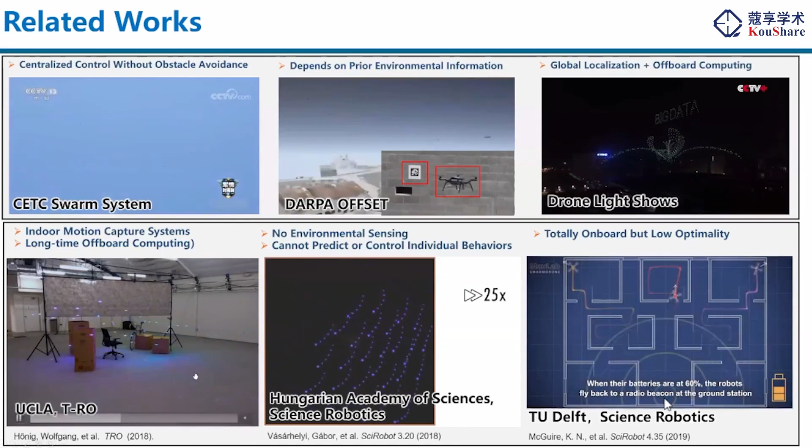In the research field in academia, we can see from previous works in swarm research published before our paper in Science Robotics that they propose autonomous swarms, but with only very limited autonomy, meaning they can only finish simple tasks such as following walls and exploring indoor environments.

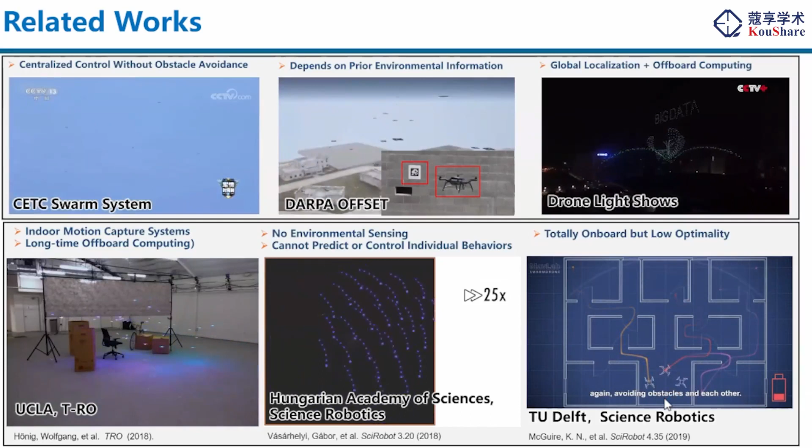Other works, such as one published recently in TRO, show people doing swarm coordination and planning, but this work also relies heavily on a motion capture system to localize the drones and on a ground station to compute all the trajectories, and all this computation is done offboard.

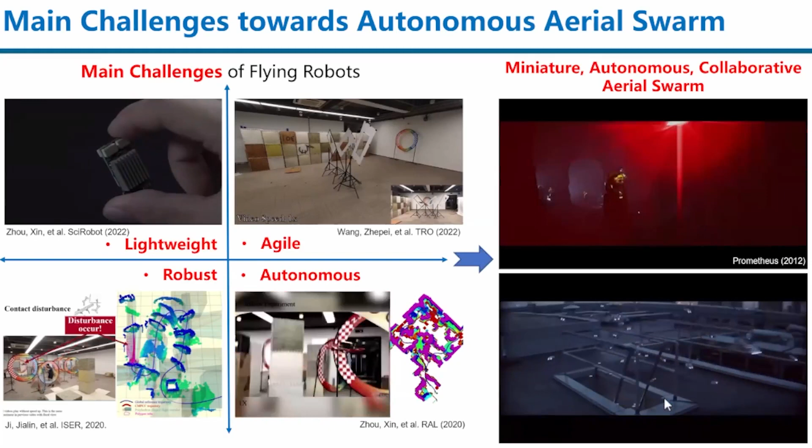Based on these observations and our basic motivation, I summarize some research challenges we have to solve first before moving toward our ultimate goal of making a miniature-size, autonomous, and collaborative aerial swarm system. The first challenge I name as lightweight: we have to build a very tiny drone platform with limited size, weight, and power that can do agile autonomous flight even in very complex environments.

The navigation functionality should be very robust to deal with many disturbances such as wind and human disturbance. Also, this whole system should work all by itself; it should be a fully autonomous system.

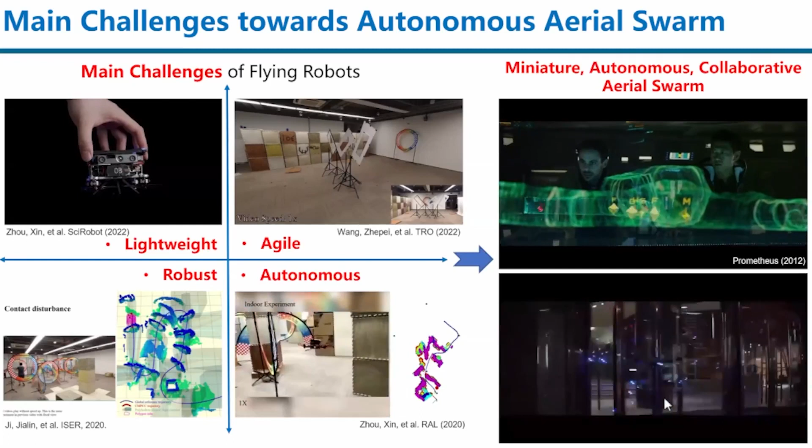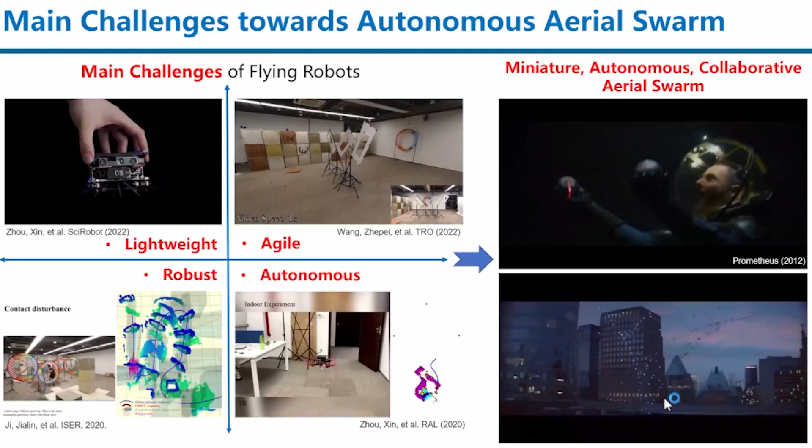After we finish addressing all these challenges, I hope we can finally make some swarm systems such as shown in these videos, which I've quoted from some scientific movies. By the way, I think that's also the point that fascinates me about robotics: it has long-term fascinating scientific imagination as a goal, and it should also have many step-by-step solid technology accumulations that can help us chase this dream.

To this end, we first have to deal with a basic system consisting of many basic problems, such as how to make a single drone that can fly with full autonomy. We name this diagram the perception-action closed loop, which means the drone should use sensing capabilities such as cameras and other sensors to collect information from the real world and compute its own pose at real time, which is called localization.

It should also understand the environment—at least where the obstacles are and where the free space is that it can fly through. That's called mapping. Based on localization and mapping, the drone has to do planning, which generates a safe flight path to avoid any possible collisions and navigate to the final target.

Then the controller will execute the flight path perfectly and let the drone localize and stabilize itself during flight. After all this is done, we have built an autonomous drone such as shown in the right-hand figure. This drone is built in our lab at Zhejiang University, with a depth camera and also uses the inertial measurement unit inside the flight controller to do localization and mapping.

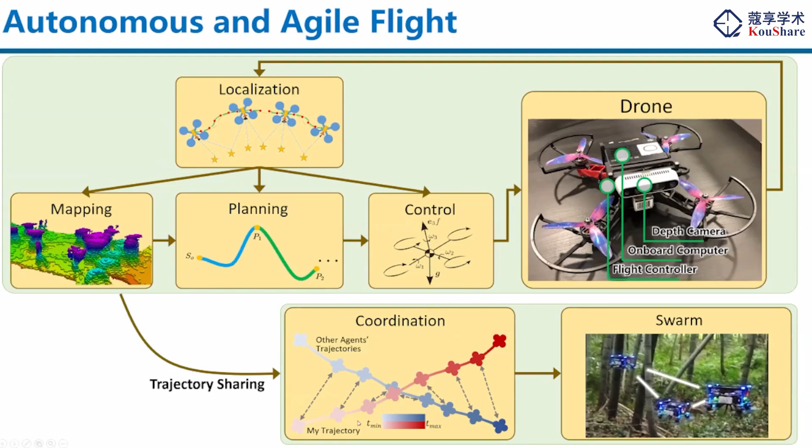All the functionality, including localization, mapping, planning, and control, is done on the onboard computer in real time. After building this single drone, we wanted to take a step forward toward coordination, so that we could then build a swarm system.

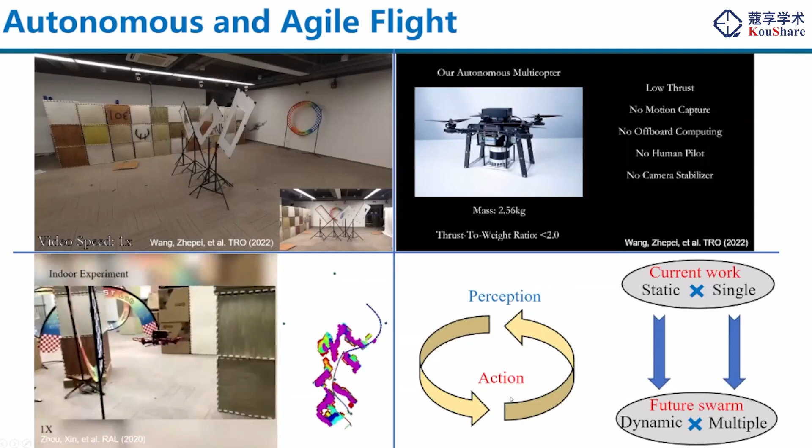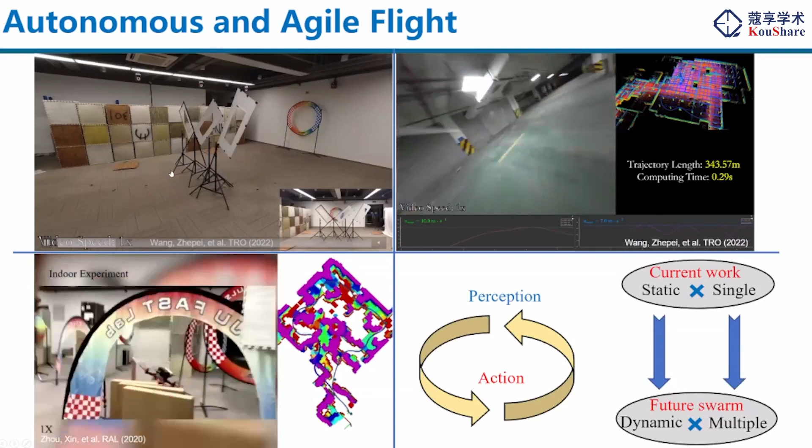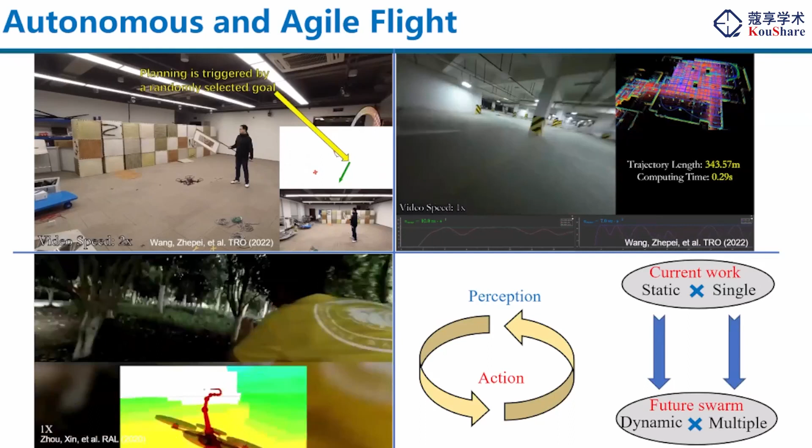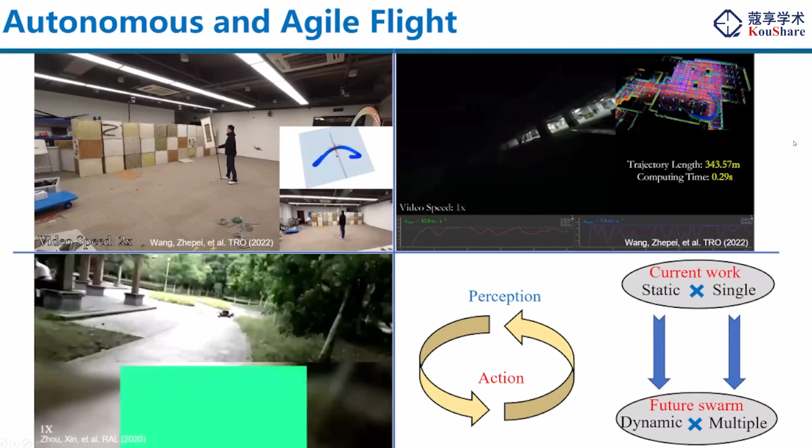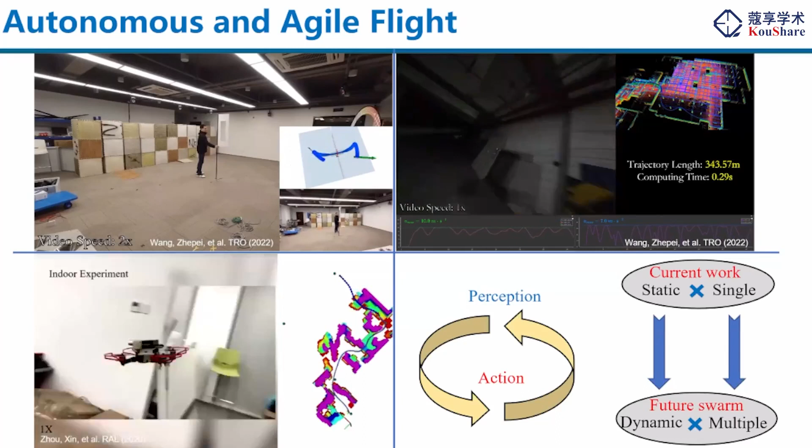In the second video, we show a drone flying with full autonomy at a very high speed, up to 10 meters per second, in a totally GPS-denied environment, an underground garage where the obstacles are previously unknown to the drone. It has to detect all the obstacles and plan a safe flight path in real time.

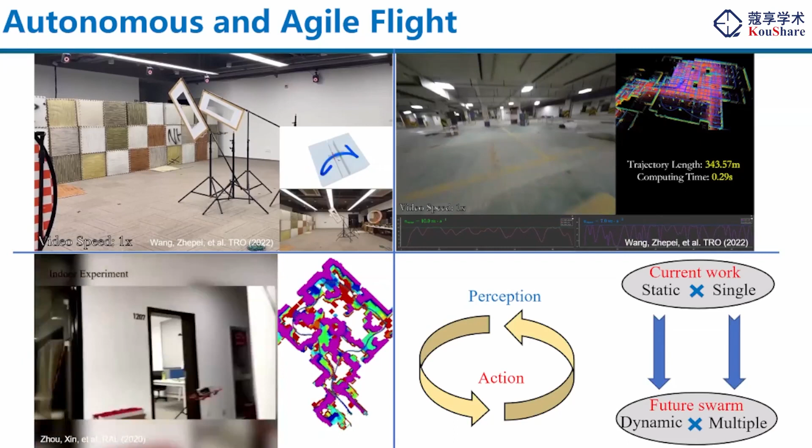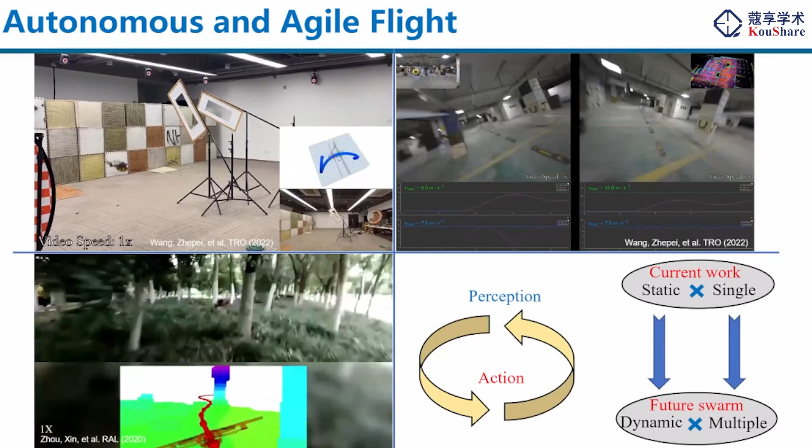This video shows a drone equipped with only vision sensors flying without any external localization devices, in various indoor and outdoor experiments.

I want to summarize some more technology difficulties we have to face towards the next step, swarm. Current work has successfully shown the application of a single drone navigating in static environments, but if we want to extend it to swarm, we have to deal with two challenges.

The first is we have to plan safe trajectories in a fully dynamic environment, because with multiple robots, they will interact with each other during flight, even in a static environment, and also the environment itself may be dynamic. So we have to extend our planning algorithm and sensing algorithm to handle a fully dynamic, previously unknown environment, and also make our algorithm support more than one drone at the same time.

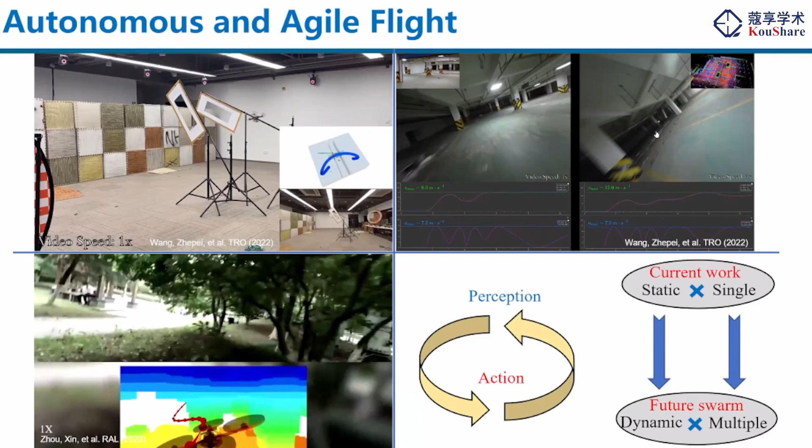To this end, I want to first introduce some of our recent work on autonomous navigation in dynamic environments. As we can see from this video, this work was published at IROS 2021 and is one of the best application paper finalists.

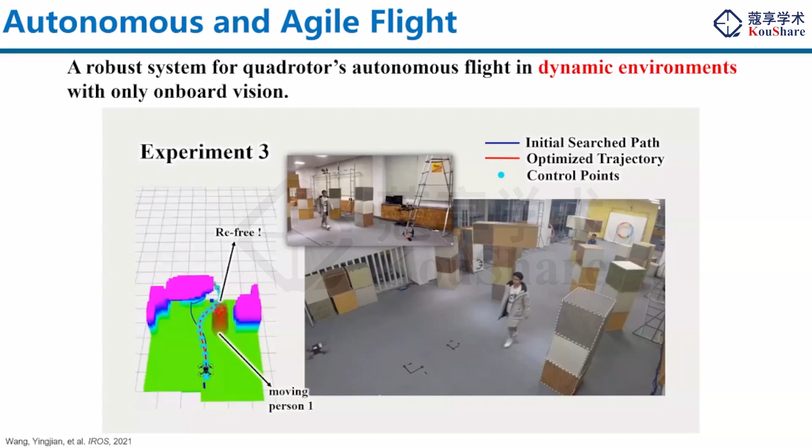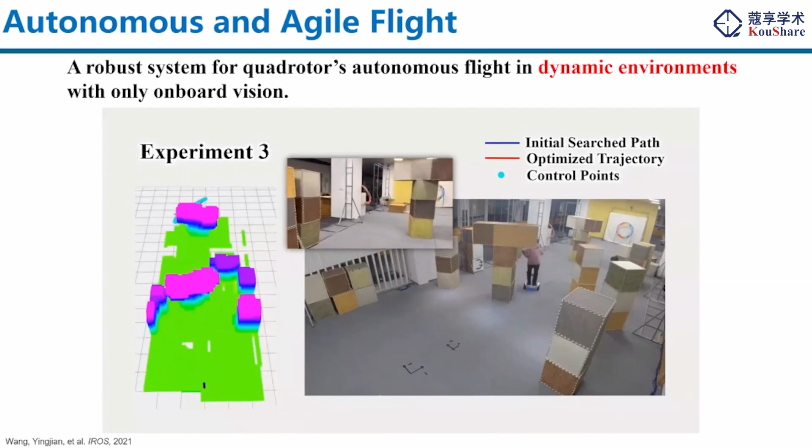In this work, our drone is only equipped with a stereo vision sensor, and we classify the obstacles as static or dynamic. After obstacle classification, we also have a module that tracks all the moving obstacles and predicts their future motion.

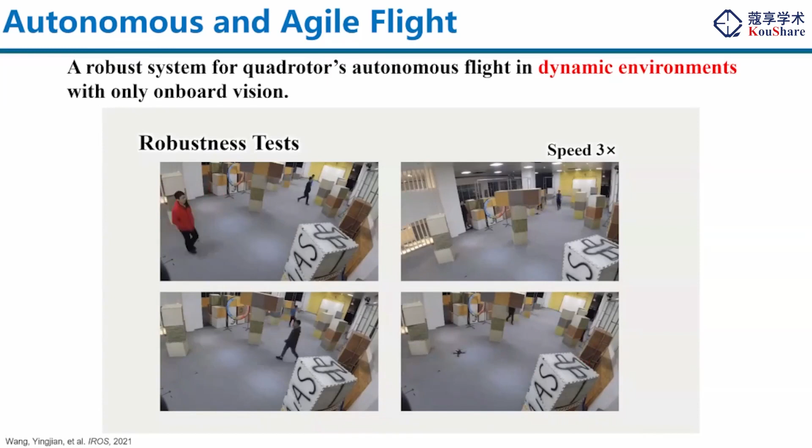Based on the sensing of the static and dynamic environments, we build two maps, and then propose a two-layered motion planner that can guarantee safety against both static and dynamic obstacles. A simple system diagram is shown in this figure.

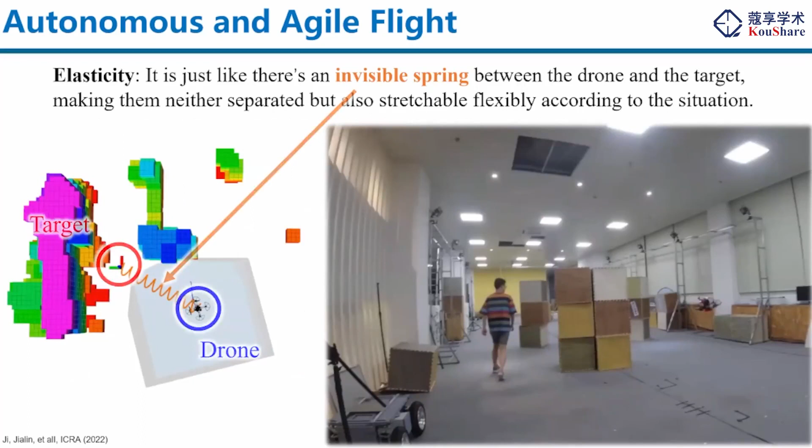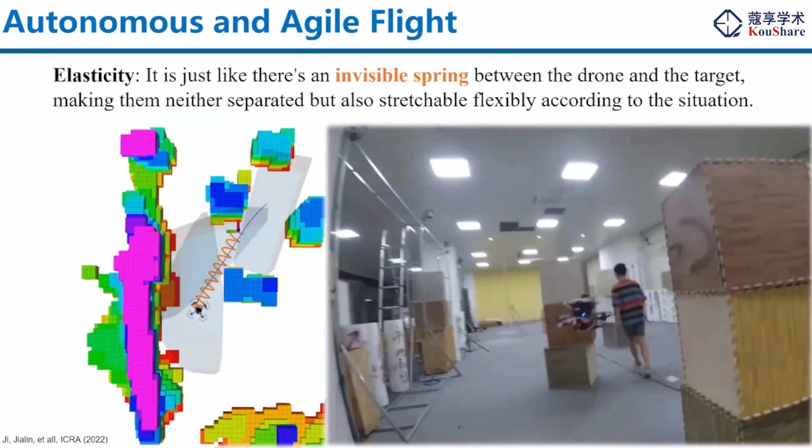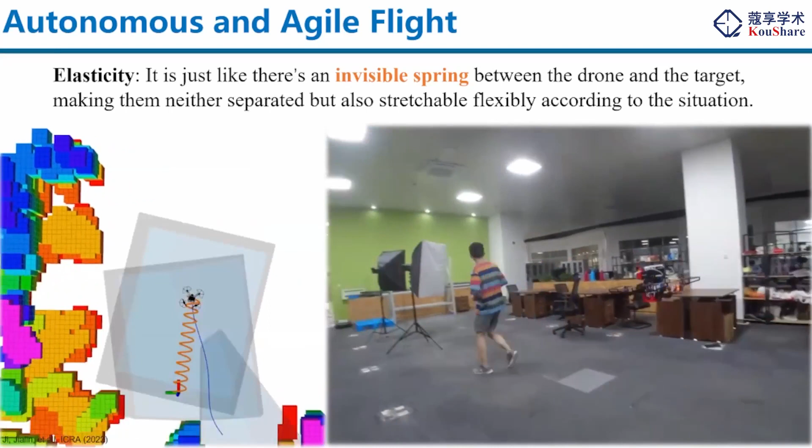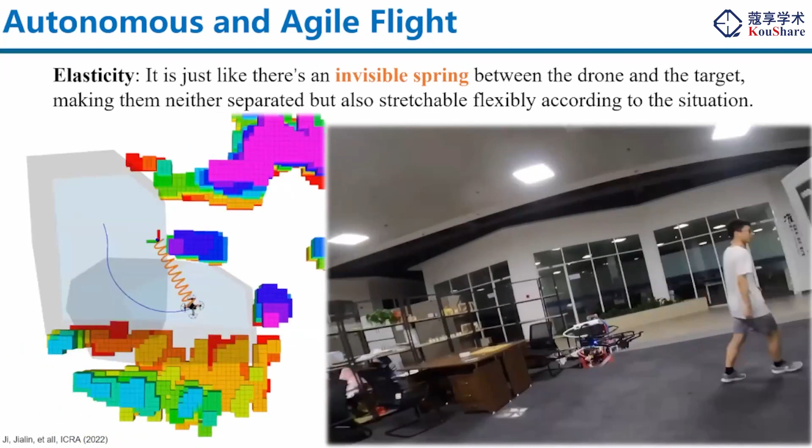Also based on safe obstacle avoidance in a dynamic environment, we want to add more functionality to our drone. We want this drone to follow moving people in an uncooperative way, meaning it has no information, communication, or coordinated control with the tracked target. So our drone has to keep a proper distance to the target — it cannot be too far, because it may lose the target and fail the tracking, but also cannot be too close, because it may be dangerous to the human.

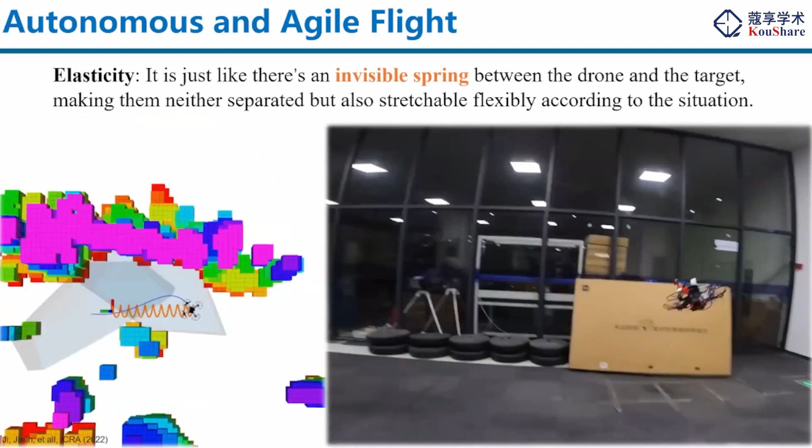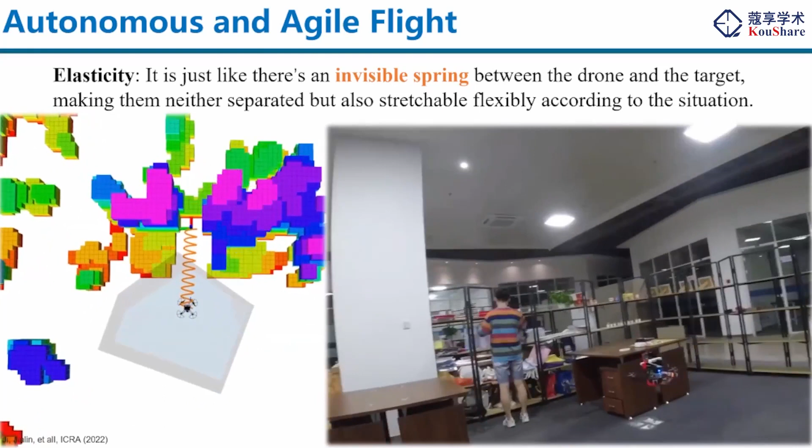So we propose a new algorithm, namely elastic tracking. We model the tracking distance constraint like an invisible spring between the target and the drone, because it has a stretchable flexibility according to the situation to keep them at a proper distance.

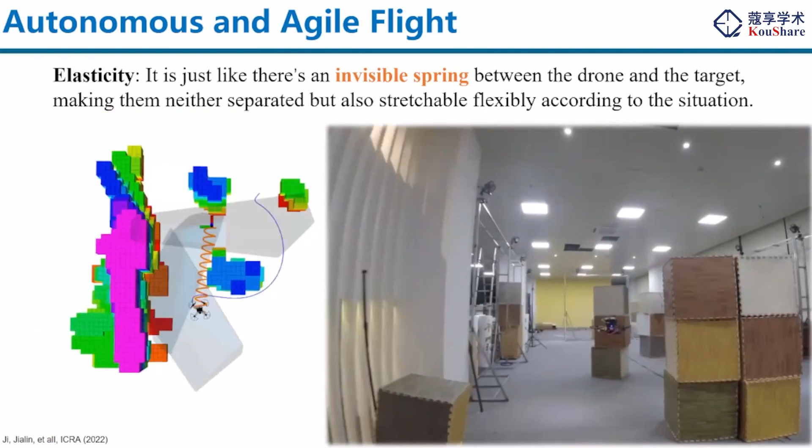But this is just an imagination and a motivation for how to mathematically solve this problem. It's a concrete planning program. So we write down this tracking trajectory optimization, and we can find that we have many constraints, such as boundary condition constraints — the drone always has to start from its current initial pose.

The drone should always have a collision avoidance constraint to avoid any possible collision, and also a visibility guarantee, meaning since we have a limited field of view of the vision sensor, we have to keep the target always in the FOV of the robot.

And finally, we have the distance keeping constraint I just introduced, which is modeled as an invisible spring. So we put them all together and propose a new customized optimization solver to quickly generate a safe flight trajectory, represented as a piecewise polynomial.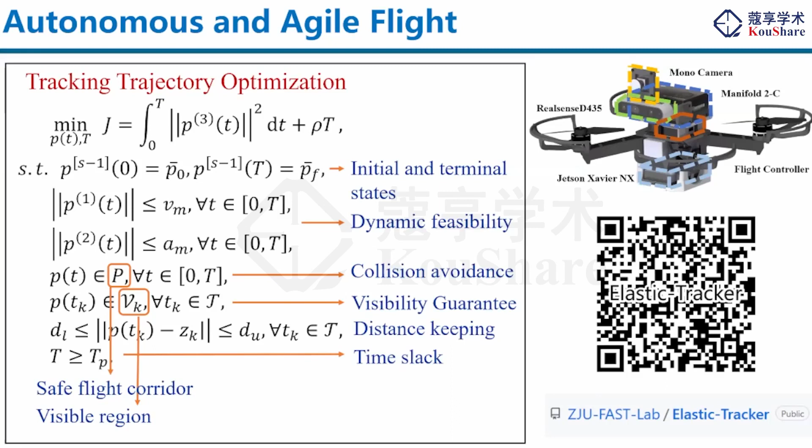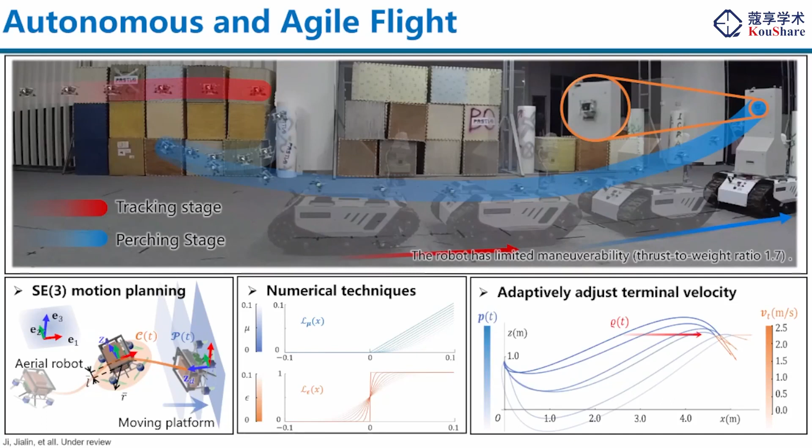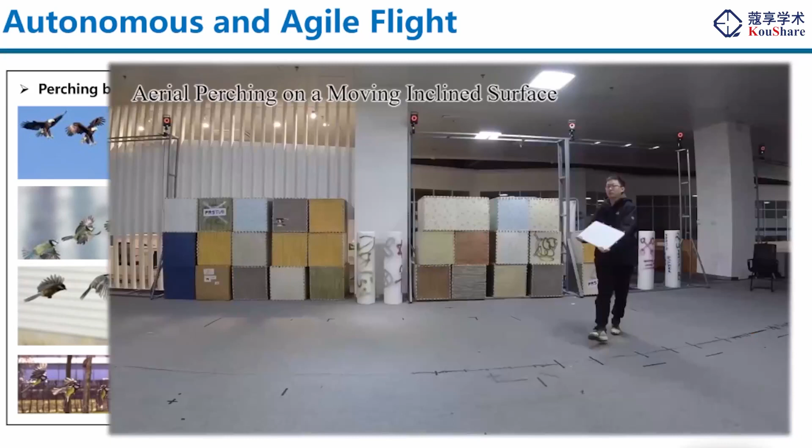Recently we also extended the tracking application further. We want to do autonomous landing, which is also named perching for birds. We use this word perching to let our aerial robot quickly land on a moving inclined surface. Based on the tracking program you saw in the previous slide, we have a complicated mathematical program, and now we want it not only to follow the target but also to land on this moving target. So we have more constraints and the program becomes even more difficult.

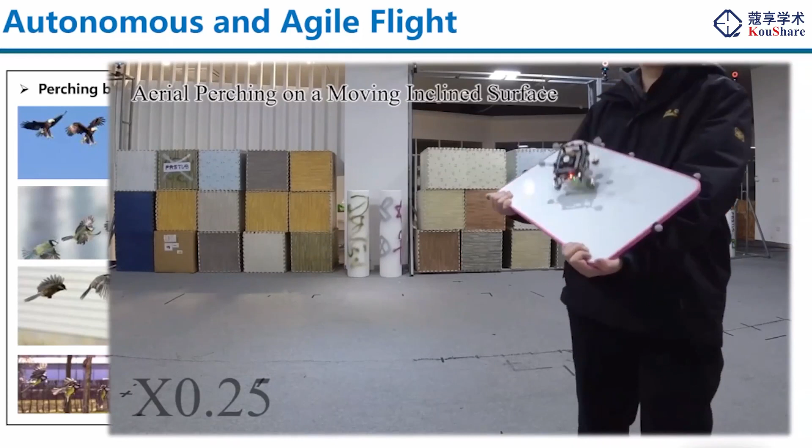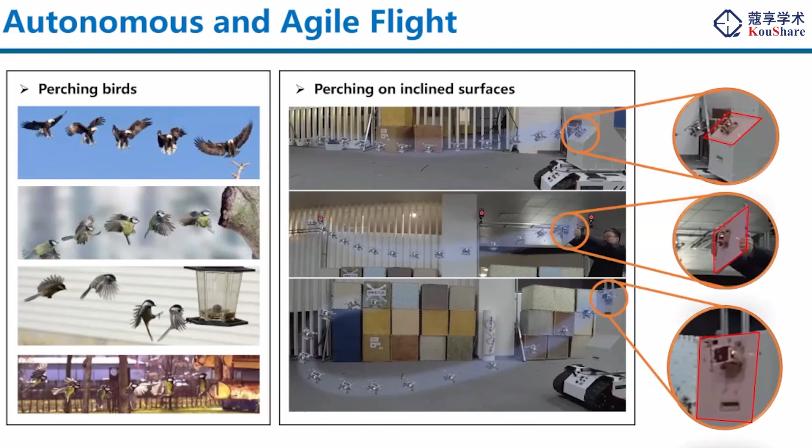Fortunately, since we have our customized solver, a method named MINCO published this year in a robotics transactions journal, our trajectory generator can support any kind of user-defined analytical constraints, and no matter in static or dynamic environments, it can safely generate a dynamically feasible curve for the drone to fly within several milliseconds.

So we successfully did the aerial approaching and landing. Based on all this recent research progress, and of course the previous single drone navigation technology in static environments, we think it's time to push the boundary toward autonomous swarms. Last year we built a scientific swarm system composed of many drones - I think here 'many' means more than 10 - a miniature swarm aerial robot platform, with each one able to do autonomous navigation with only its limited onboard sensing capability.

First, I want to introduce some of the hardware design. As you can see from these figures, our drone has a very limited size, with a tip-to-tip size of only 8 centimeters. The total weight of the drone without the battery is within 200 grams, and with the battery its total weight is about 300 grams.

For such a lightweight platform, we cannot afford heavy and accurate sensors such as LiDAR. So our drone is only equipped with a very simple and cheap stereo camera from Intel. For computation, although our drone has a very limited size, we want it to perform many complicated tasks such as formation flight, collision avoidance, and other high-level tasks like target following, so it needs sufficient computation resources to do all the calculation in real time.

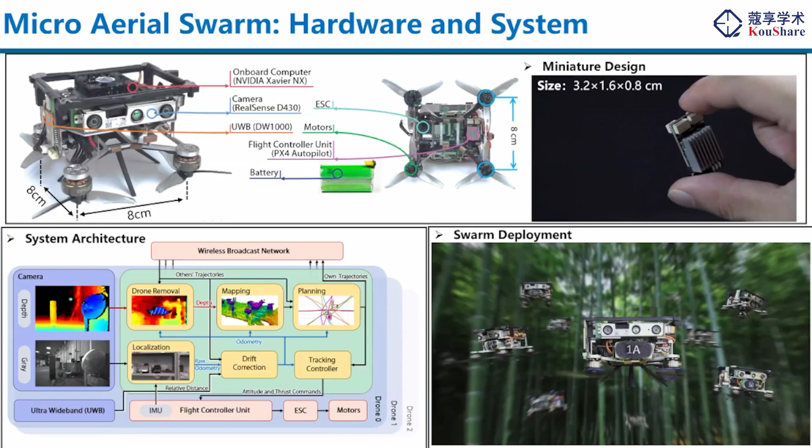Also, since we couldn't find a proper flight control unit, we customized one ourselves. Nowadays we have made a very small flight controller chip, based on the open-source and well-known flight controller framework PX4, customizing the software and hardware design based on PX4. Now we have this very small chip which can support the autonomous flight of our drone.

Based on this hardware design, we also designed a new, fully decentralized swarm software architecture. The core idea of our swarm architecture is that we want the swarm system to be very flexible. Here, flexible means each drone in the swarm system will do all the calculation related to its own flight by itself - we have no centralized brain to coordinate and communicate with each other.

Each drone does its own calculation, so even if during the flight one drone or two drones crash, the remainder of the swarm will continue its flight. Also during the flight, you can command additional drones to join the group, and they will reform a new swarm and carry out the same flight task as defined before the mission.

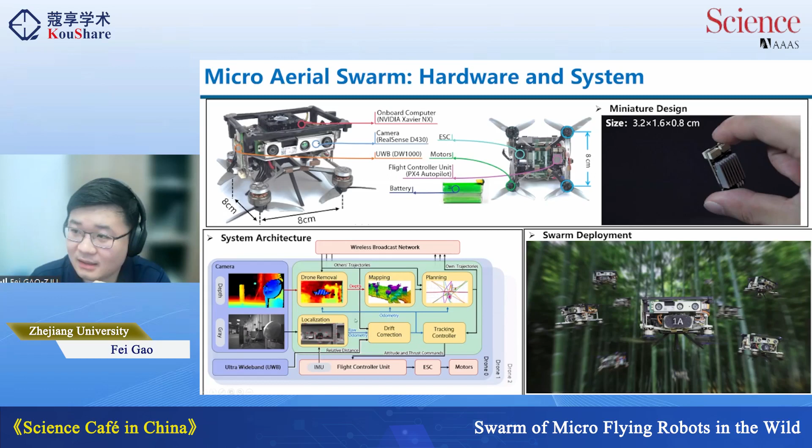Here's a snapshot of our system in experiment, and then we'll go through it component by component to introduce some key methodology used in this paper.

Based on the visual-inertial localization system, we also have another positioning algorithm which fuses the VIO and UWB measurements to calculate the relative position, translation, and rotation between each two drones in the swarm. Only in this way can we guarantee that the swarm in flight can form a predefined shape.

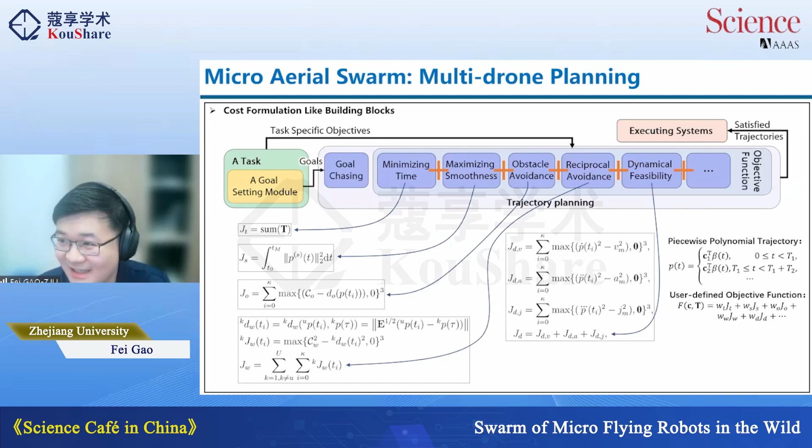One word to summarize: we translate the planning requirements into an unconstrained mathematical optimization program, and we have a customized solver which lets us solve it very efficiently. Efficiently means we can generate very difficult trajectories with respect to all the physical limits in just 1 or 3 milliseconds.

Apart from the optimization itself, we also put in some technologies, also called tricks, to make our planning system more robust against challenging and unstructured environments. For example, there's topological planning. Here, topology in planning means if there's an obstacle in front of you, you can go around it, both on the left side and the right side, and in both cases it's okay for you to reach the target behind the obstacle.

During the flight, our drone is always doing high-frequency planning, generating trajectories at 10 or 20 hertz. So in 1 second it does 20 times planning. If the drone chooses to go around an obstacle on the right side, but the next planning cycle decides to go left instead, the drone will shift back and forth. For a single drone, this causes oscillation during flight, and for a swarm, it tends to fail the obstacle avoidance mission.

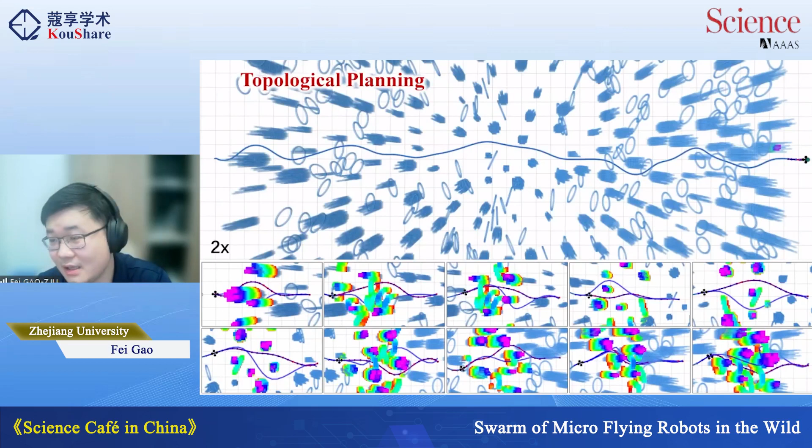So here we add a topological planning module to make our system always choose the better topology. Better topology means the drone can go either the right side or the left side, but we always choose which side is better according to some predefined rules. This way, our drone can consistently choose one side to go around obstacles, giving more stable and predictable flight performance.

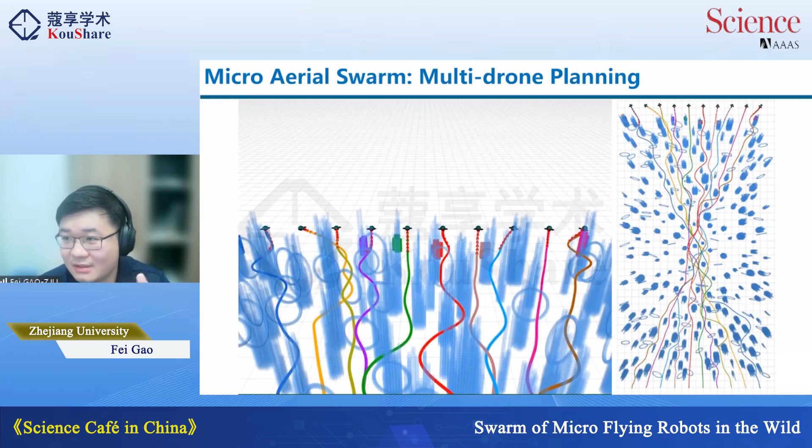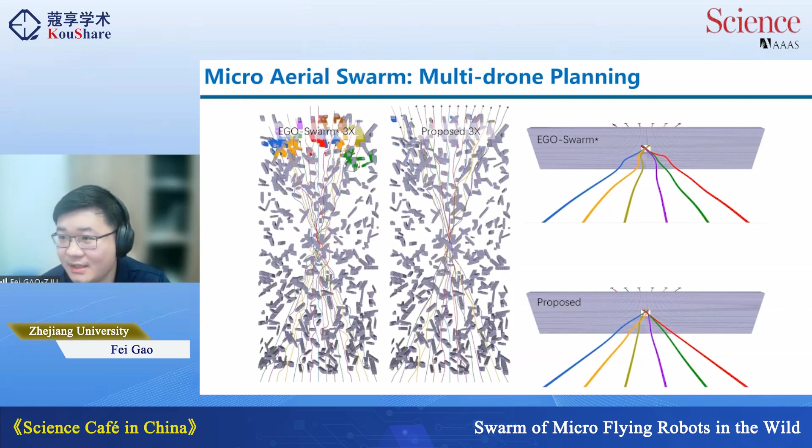Here is another video showing the performance of our algorithm. I think the sufficient and necessary condition for multiple drones to avoid collisions is that they will not appear in the same place at the same time. So trajectory generation, the planning for a swarm, means we have to optimize the shape of the trajectory and also the timing of the movement simultaneously.

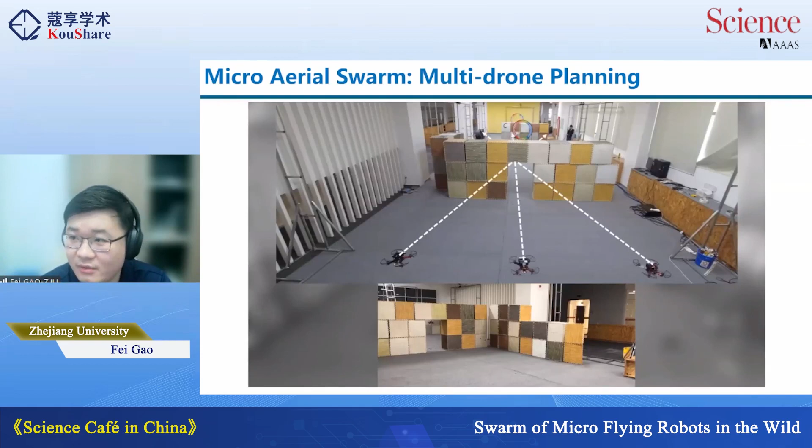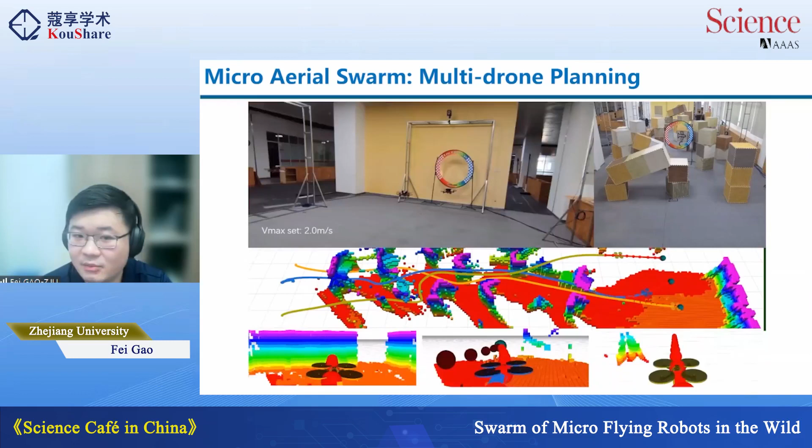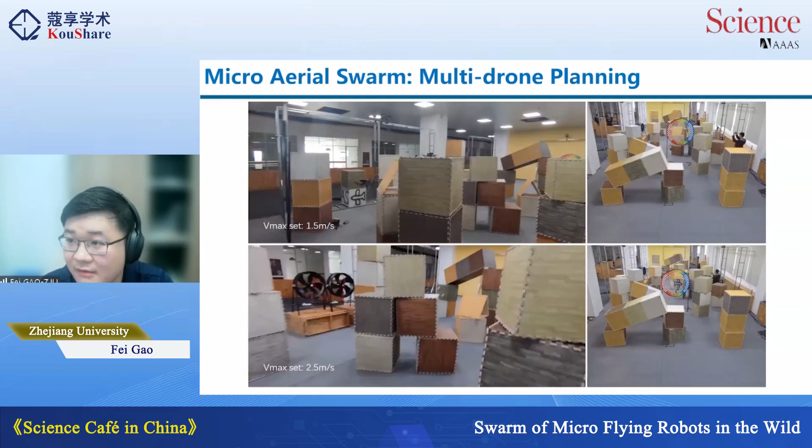Here we show the performance of optimizing time versus not optimizing time using the same planning framework. If we optimize the time, the drones can appear at the same place—that's easy to understand—but not at the same time. So even with a very narrow gate for the drones to pass through, such as shown in this video with some very narrow corridors, our drone can automatically generate safe trajectories to go through the narrow door one by one.

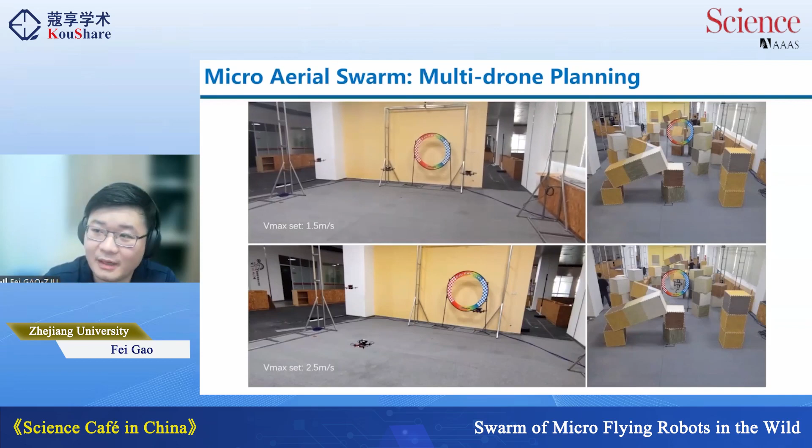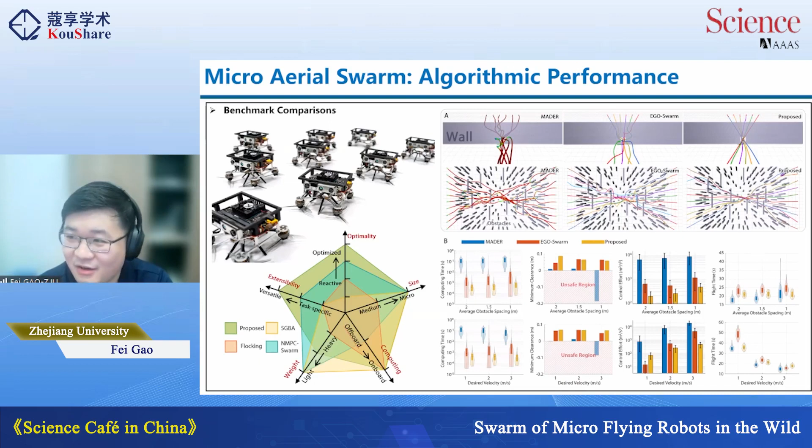Here are some more tests showing that even with many different kinds of objectives and constraints forming a complicated mathematical program, we can always safely generate the right solution. We check the minimal spacing between each drone during the flight, and also check the maximum velocity and other constraints. We found that our algorithm can always respect these constraints, no matter where they come from.

Besides the planning, some other key capabilities are very important. For example, I've just told you about the relative localization functionality, which comes from sensor fusion of visual-inertial and inertial measurement, plus UWB distance measurement. Without this sensor fusion, we can imagine that each drone would have its own position drift during the flight.

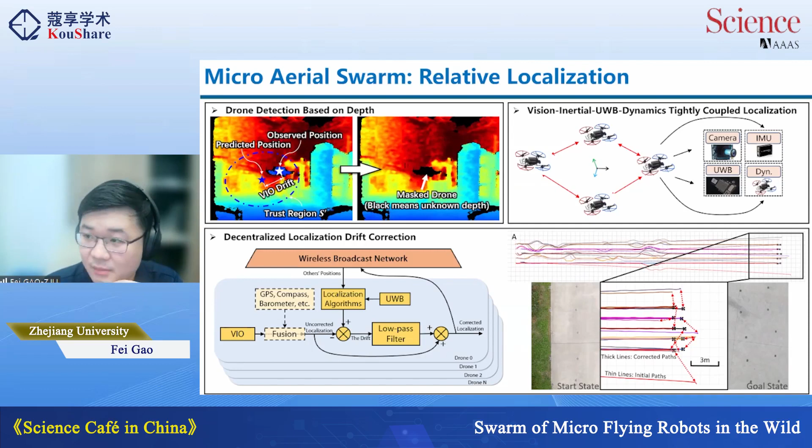Here is an experiment to show this phenomenon. After about 20 or 30 meters of flight, our formation will diverge quickly. But with the fusing of the UWB, we can maintain a good formation even in a very cluttered environment.

Finally, we can show some real-world experiments to verify the capability of our algorithm and our hardware. Firstly, here is an experiment—I know many of you have already seen these videos, possibly many times, but I want to show it again.

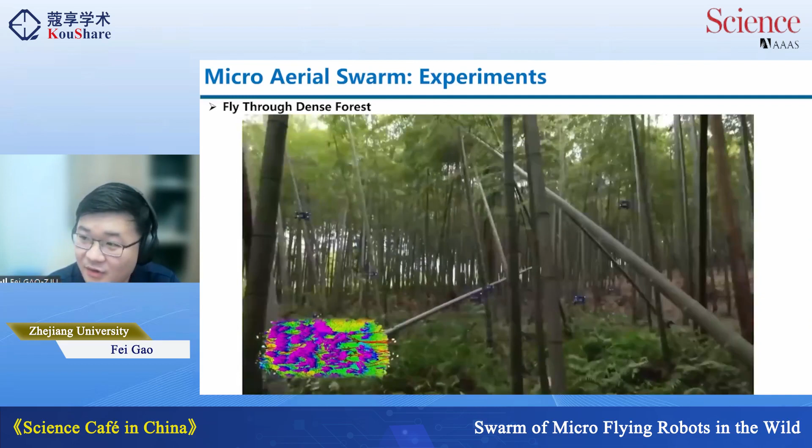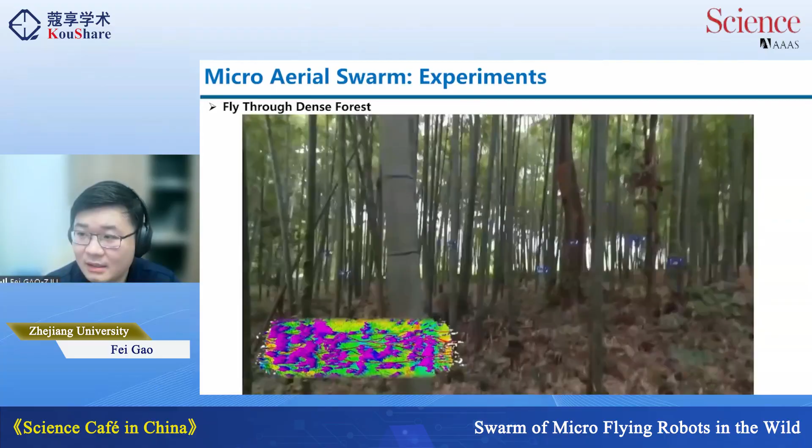We test our system in a bamboo forest in Anji, a very beautiful city in Zhejiang province. This is a very difficult experiment because inside the bamboo forest, the passing space for the drone is very, very limited. I've piloted drones for more than 10 years, and I cannot safely pilot a drone through this difficult environment.

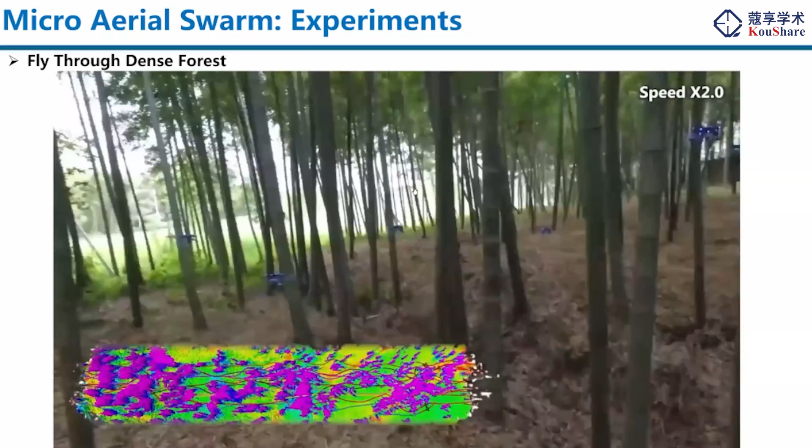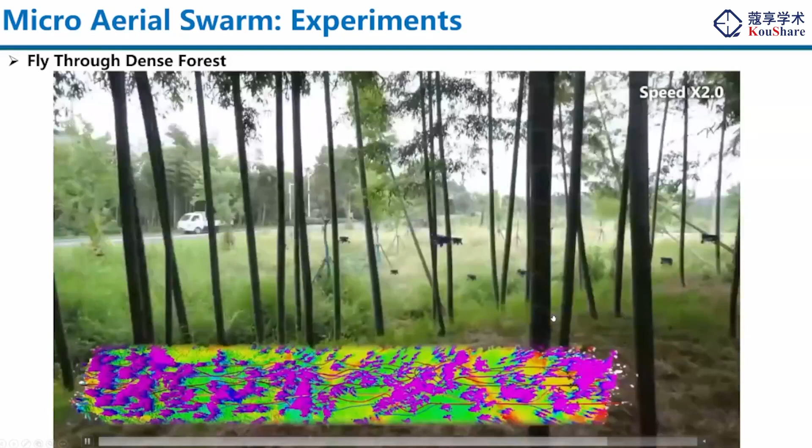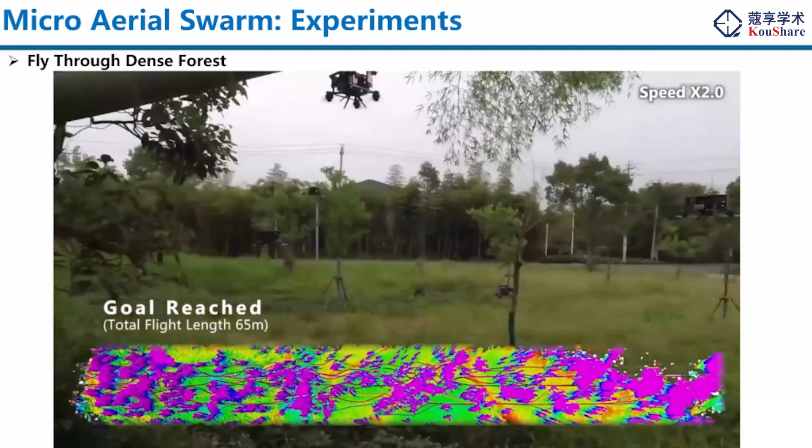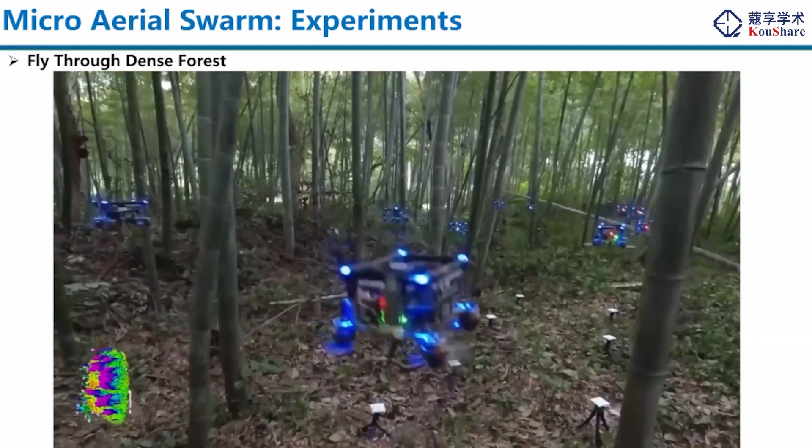As you can see from this video, at the bottom line it's a dense 3D map being built during the flight. Because we have 10 drones, each drone in the swarm has its own vision to detect obstacles and build a map. After we accumulate all the information from each drone, we can have a dense map which indicates the terrain information.

And the second environment shows the formation keeping capability of our algorithm. I want to emphasize the flexibility of our algorithm, which means we can keep a formation in clear space. You can see from this video, they have a two-line formation, right?

But when they encounter some obstacles, the drones in the swarm will quickly go around the obstacle. They will deform the formation and keep safe flight as the first priority, and after each of them goes around obstacles and returns to the safe space, they will quickly reform the desired formation.

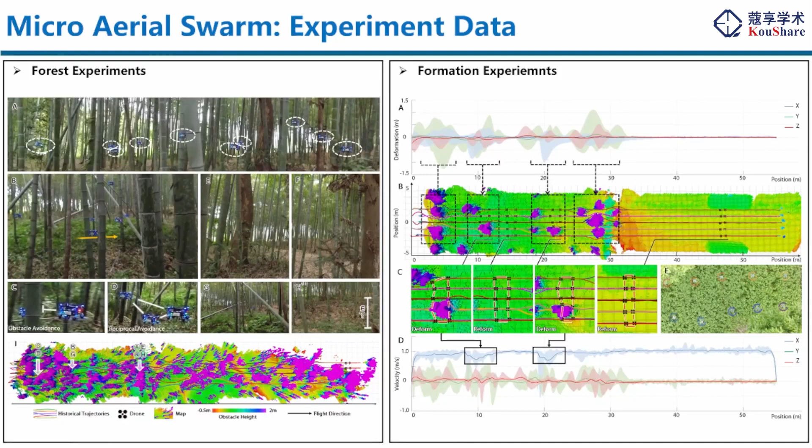These two experiments are also clearly shown in our paper. For the first experiment, we want to emphasize that some part of the testing scenario is very difficult, with very limited size for the drone to pass. For the second test, we want to show the deform and reform capability of the swarm formation, which means our algorithm can quickly select the best way to keep the balance of safety and user-defined objectives such as formation keeping.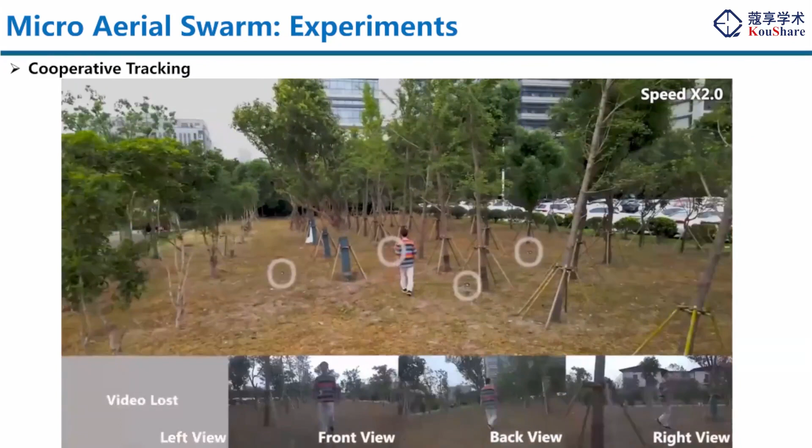And the third experiment is target following. Instead of the previous experiment where I showed one drone following people moving around in an indoor environment...

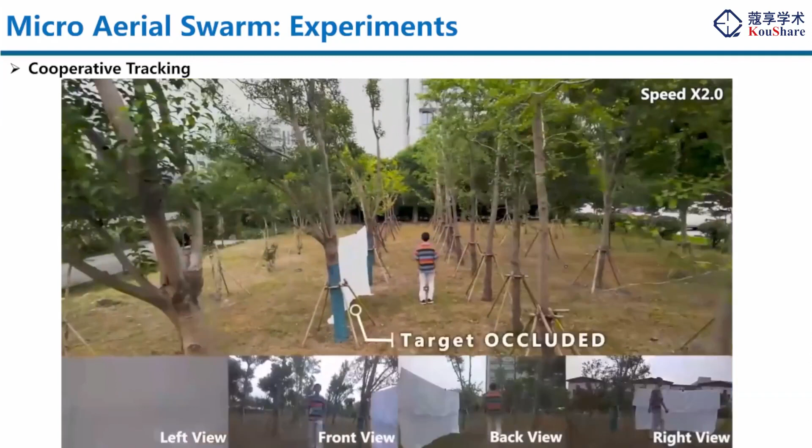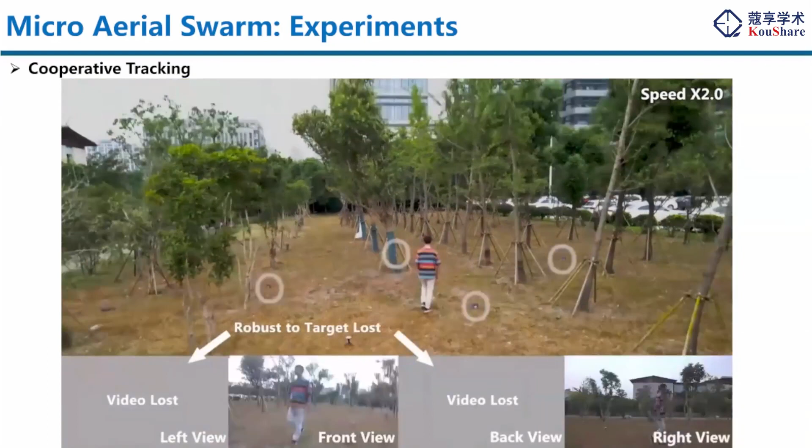Here we are showing that we have a 4 drone team, a small size swarm system, and 4 drones will continuously follow the moving person. Even when one drone's vision is occluded by some unknown environment, other drones will tell it which direction the target is moving. So the one which is occluded will have the information to continue its task.

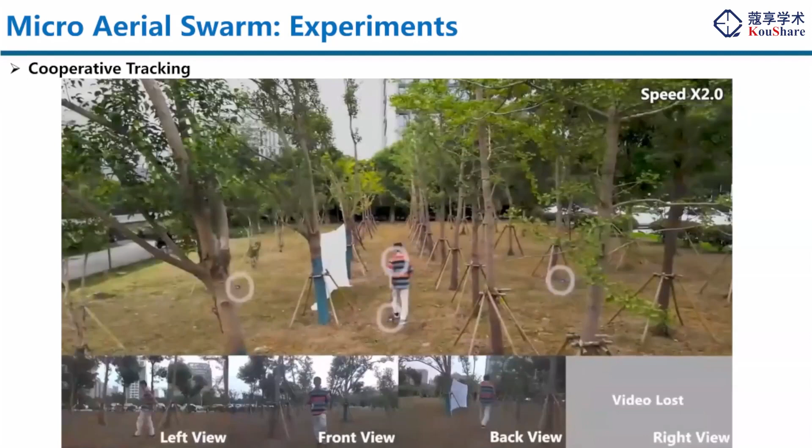I think that's good evidence of what a swarm can do, why a swarm can do much better than just an addition of some single 1, 2, or 3 drones simply added together.

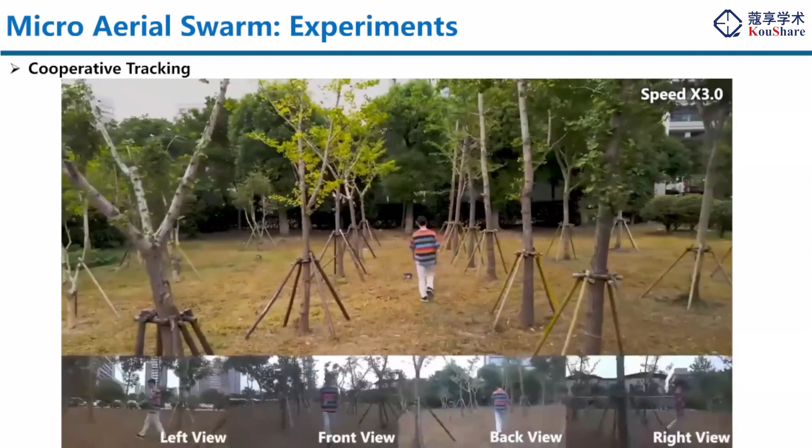And finally, the last experiment is a robustness test. We call it intensive reciprocal avoidance test. Here we let 10 drones select randomly the target in a circle.

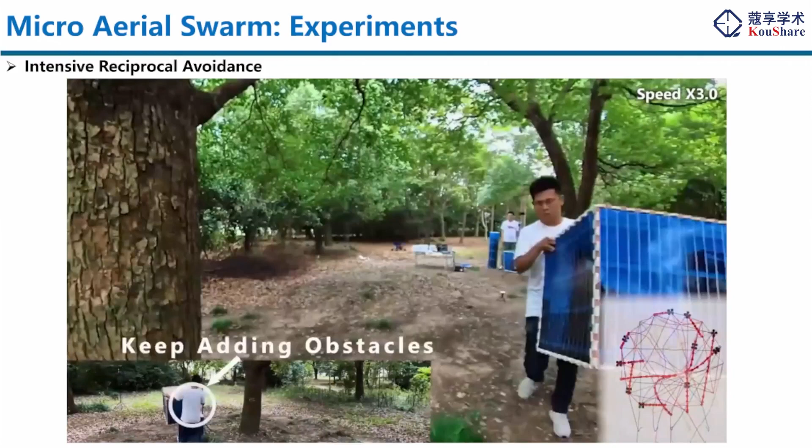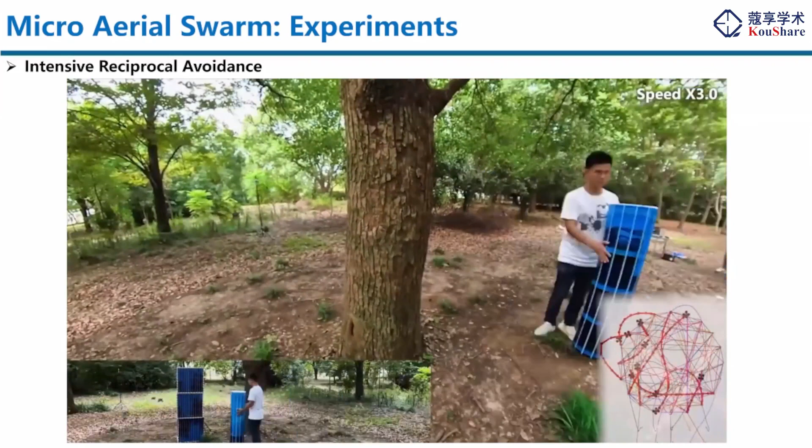And during the flight, my student Mr. Zhou Xin, who is also the first author of this paper, will continuously walk through this flight area and add some new obstacles, and we will also interact with some of the drones to add more difficulties to the test.

And we can see from this video, our algorithm can always generate safe flight trajectories even in such a dynamic and challenging environment, because each drone has to avoid collisions with others, and also avoid possible collision with the moving newly added obstacles, until it consumes all the power and receives the commands to land.

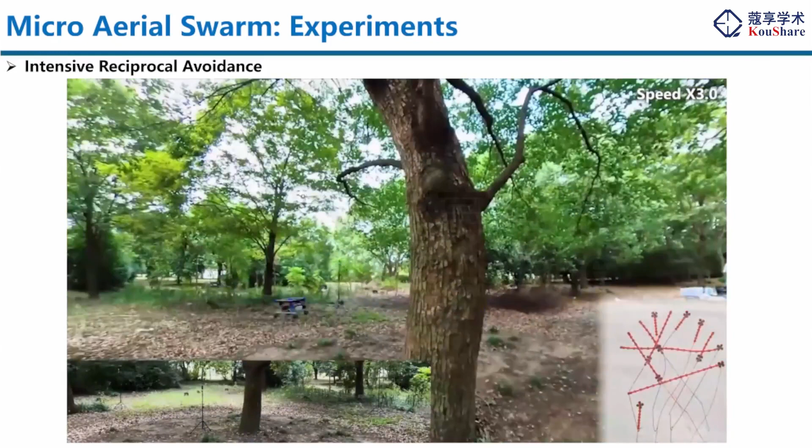Here are the results of these two experiments showing the successful application in such user-defined high-level swarm applications, such as target following and continuous position swapping.

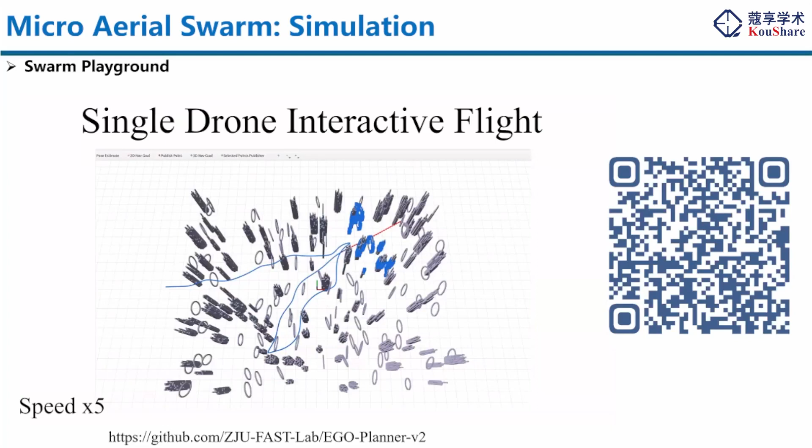Finally, I want to show a video of a simulation platform we call Swarm Playground. I want to show this simulation because it's part of the open source results of our paper, and we have released this simulation environment and also the core motion planning algorithm together in our group's GitHub. If you are interested in multi-drone planning, trajectory generation, or drone simulation, you can check the QR code and get more information about this package.

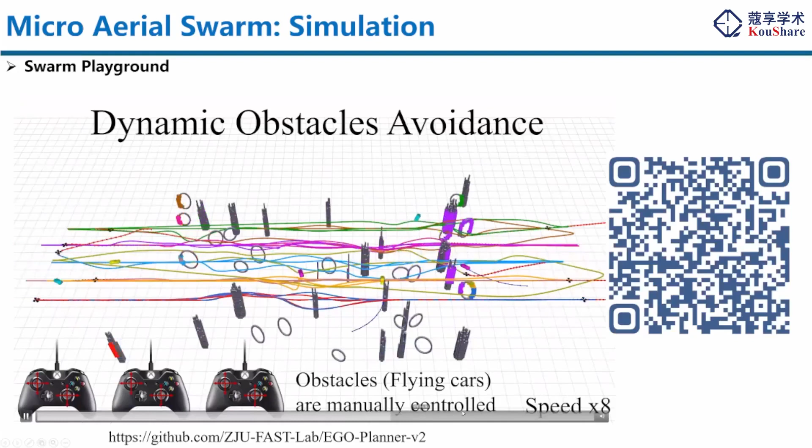We provide some interface for the human to send commands to the drone, to a single drone, and also to a team. We also provide some functionality so you can add moving obstacles, such as many moving cars, to test dynamic obstacle avoidance capability. And we implement a very simple version of the formation keeping algorithm, so in the simulation you can try it yourself.

And finally, here is my group. Now I'm leading a small group consisting of around 20 students and research assistants working in Zhejiang University, and also Huzhou Institute of Zhejiang University, which is a wonderful place to conduct cutting-edge research.